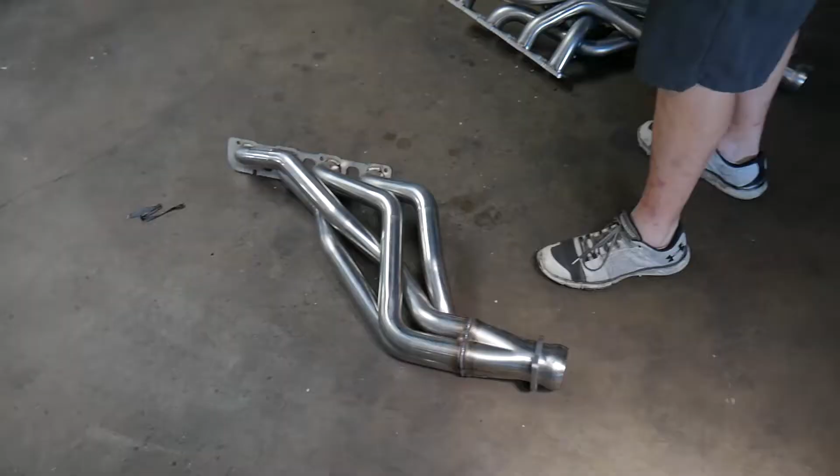And there they are, the Kooks goodies. John's been busting ass, and not out of his ass, like he's been working hard.

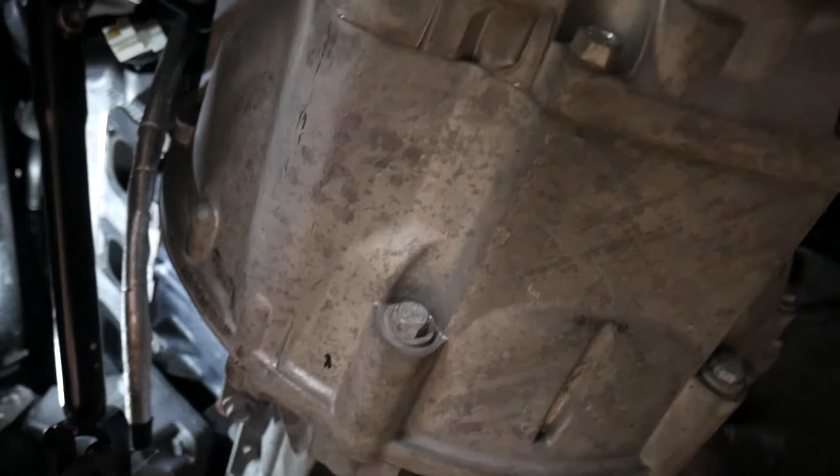He's got those stock manifolds out, so we're gonna get the sides of the heads cleaned up and start getting these Kooks long tubes installed right after lunch.

But both the headers are up now. We're just getting them finished tightening everything up, and then we'll get the mid pipes up, and it'll be time for a little pulley change action.

We'll probably go ahead and, before we wrap it up, pop the plugs out and tighten the gap up and check them. This car's been Procharged for a while, so we may throw a new set of plugs in it as well, but we shall see.

And just like that, we got some headers installed.

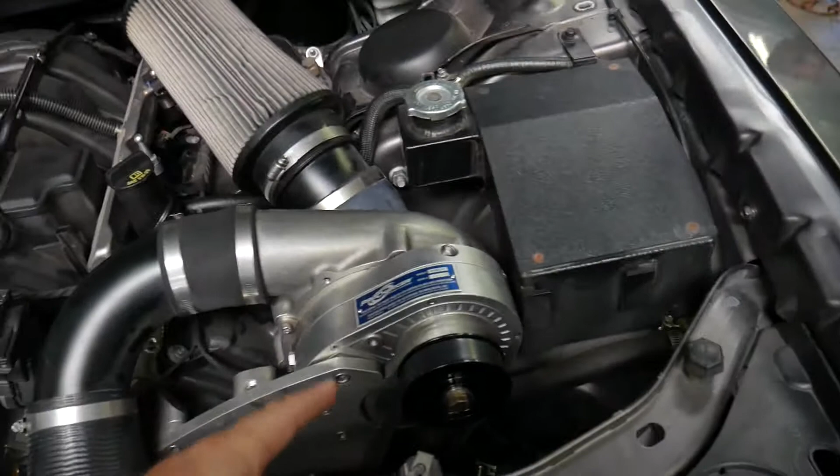Unfortunately, guys, I wasn't able to get any of the pulley change on camera for you. John knocked that out really quick while I was in the office with some customers, but no worries, it's done.

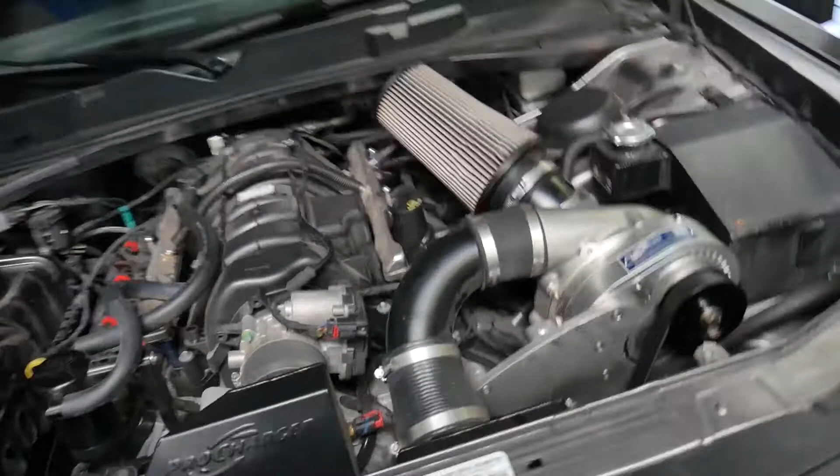The factory pulley that was on here was a 3.50. We went down to a 3.20. So hopefully that should net us 1.5 to 2 pounds of boost. We'll see when we get it on the dyno.

I'll see if I can find, because it was a long time ago when we did this car, the old dyno pulls from the last time it was on the dyno, so we can get a before and after of what it made. But it's all wrapped up, and we'll get the first start here in just a few moments.

To get you up to speed on the Raptor from this morning, we did some troubleshooting, some diagnostic on it. There's an exhaust leak, we're going to get that repaired, and we're going to put a fresh set of plugs in this thing. We're not going to do a full dyno tune on it, but we're going to do a little street tune. That's all that's happening to this one.

And then we had this Toyota Tundra dropped off. This is actually a family member of mine's. Pretty clean little truck. I got him some rock lights for it for Christmas, so he finally brought it in. We're going to get those installed on this tomorrow.

And then the 300, the Chrysler 300 y'all seen this morning, which is still out here, that was a diagnostic as well. Had a check engine light on for the exhaust gas pressure sensor. Really dumb. This car no longer has the exhaust provision for that due to the modifications to it, so that's why the light was on.

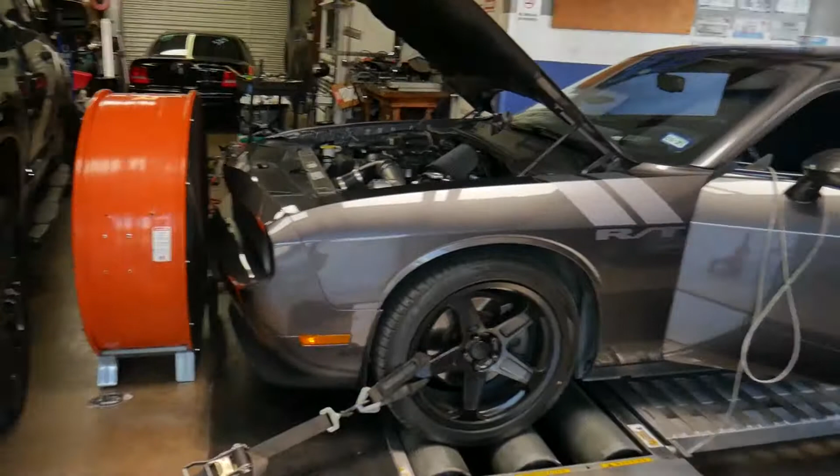Alright guys, so as you can see, we got Corey's on the dyno, and I missed filming the first pull, but I went in and made a few changes and pulled some timing out of it just so I could see where we ended up with boost and what our air fuels were looking like.

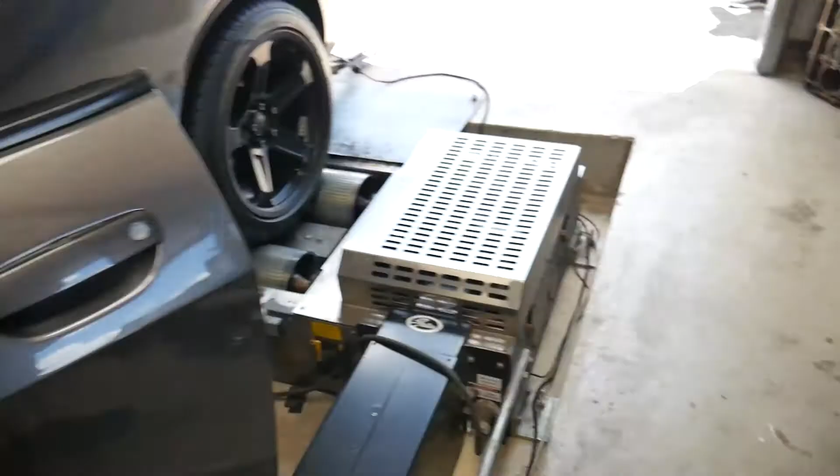But I just flashed it again. Here's the previous run, 486 and 508. Just a recap, this thing is a manual 5.7 with the Procharger on it. It's a P1 SC. Got it warmed back up, let's go ahead and make another tug.

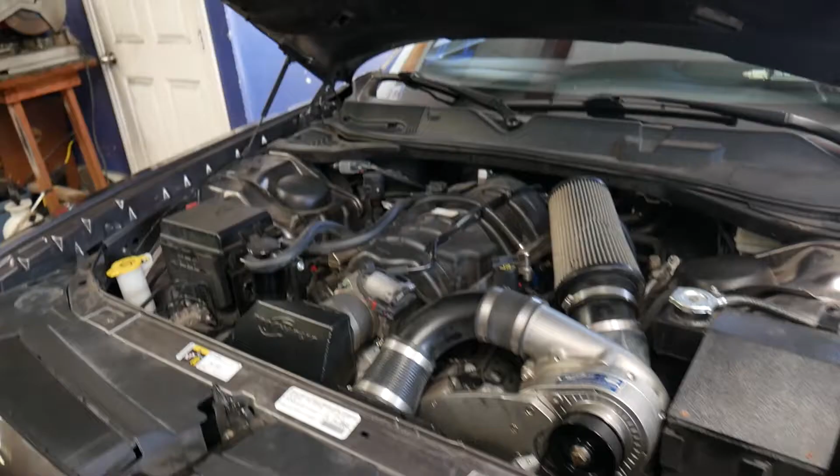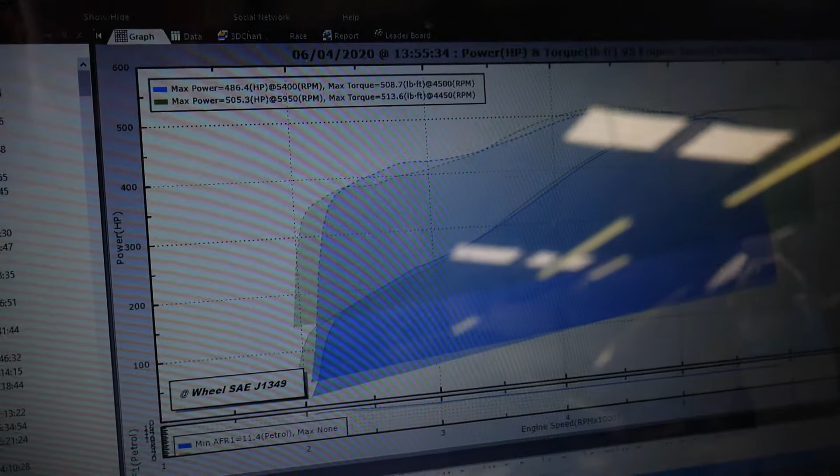Alright guys, that was a good tug. Nice gains on that one. So 505 and 513. Look at that.

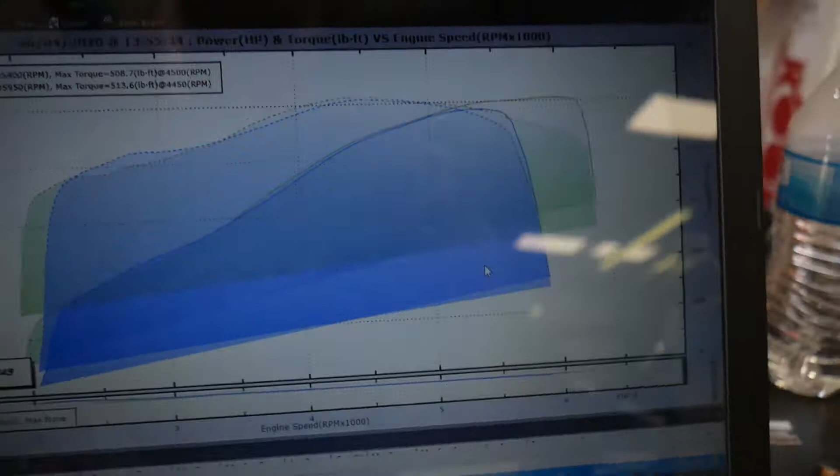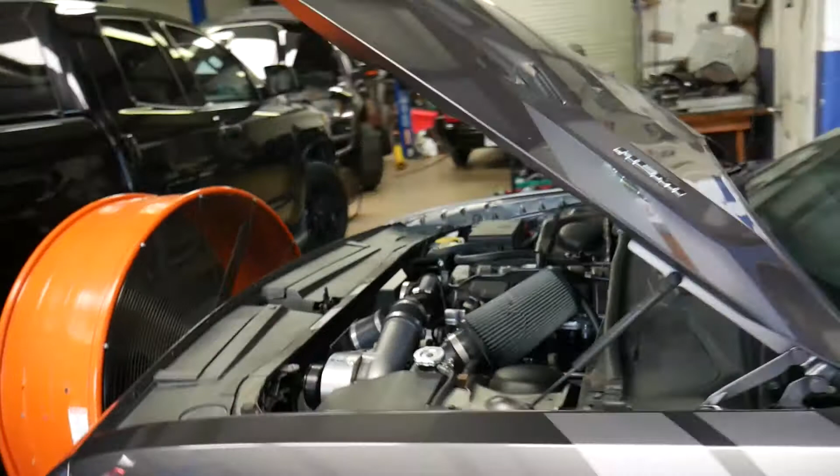So I'll go ahead and take a look over the logs here and see where we ended up with everything, and then see if we can squeeze a little more out of this 5.7. But I bet she feels pretty good.

Alright guys, so I looked over the logs. The standard P1 kit for these cars I think makes around 6.5 pounds of boost. We changed the pulley out from the 3.50 to the 3.20, and after reviewing the logs, it looks like we made 9 pounds. So we picked up about the 2.5 pounds that we were looking for with the pulley change. Also, to gain that boost level, we did raise the RPMs. I think factory is 5900 on these cars or something of that nature. We've got it at 6,300 RPM now as redline. So that also helped, raising the RPM got us a little bit more boost with that pulley.

We're still running the same belt that came with the kit, same size, same length, and it doesn't appear we're getting any slip as of yet. At some point we will make the recommendation to go with a Gates greenback, because we find those are about the best belts. The RPM series belts, in our experience, are junk, but the Gates greenbacks, the HD belts, are good. So for now, this belt's holding, it's not slipping, everything's good, but when it is time to change, we're gonna put a greenback on it. And we're gonna look over the log one more time, make some more changes, and see where we end up.

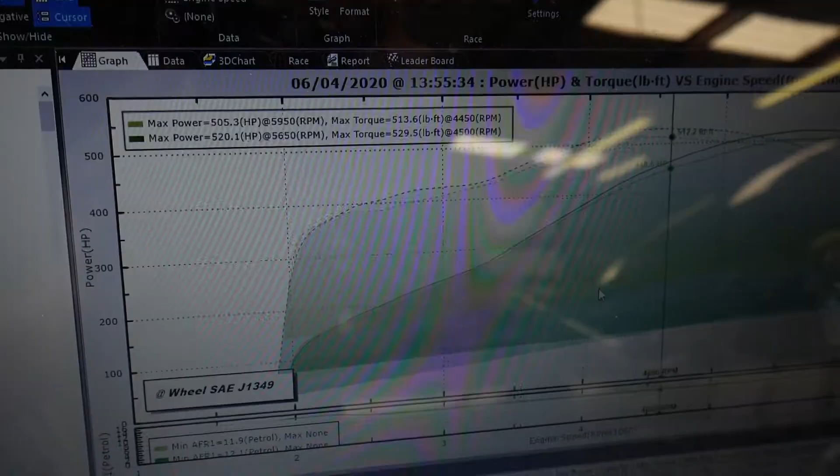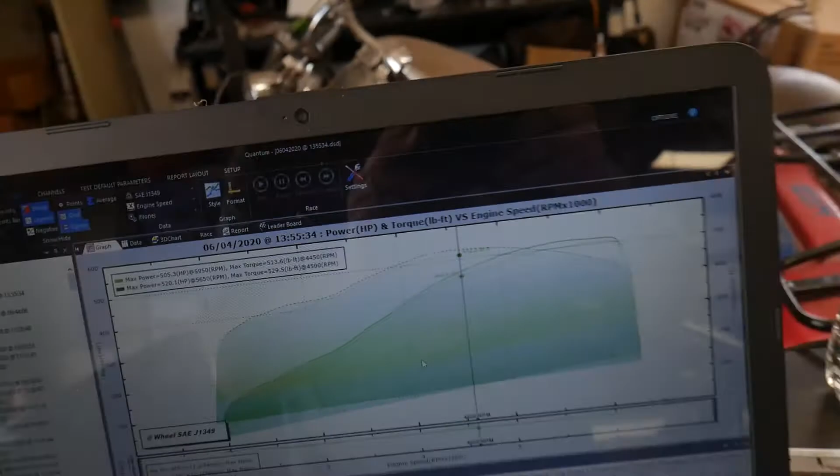Ooh, look at that! Sprinkle a little timing in the right places. She liked it, dude. So now we're at 520 and 529. Very nice, very nice. This 5.7's starting to scream.

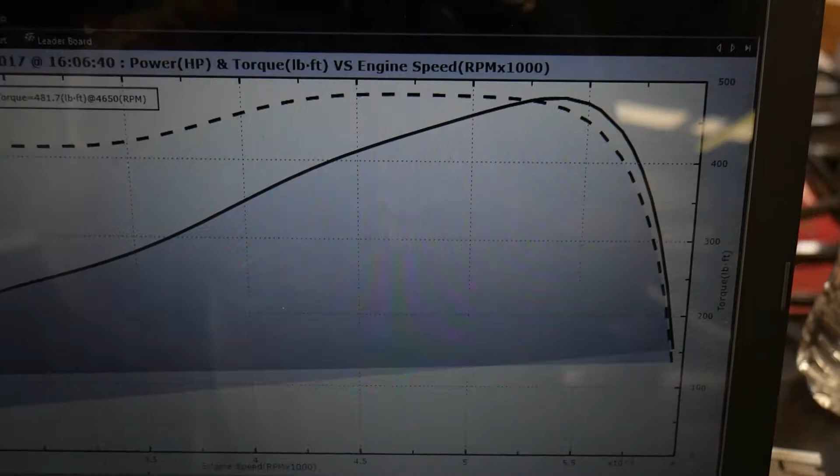Took a second to go back in the computer on the dyno and find out when we dynoed this thing, when we did the blower. Turns out we did this car 3/30 of 2017 is when we did the supercharger. So it's been on here for a while, doing good. Here was his previous dyno pulls. Last time the car was here when we did the blower, it made 479 and 481 foot-pounds of torque.

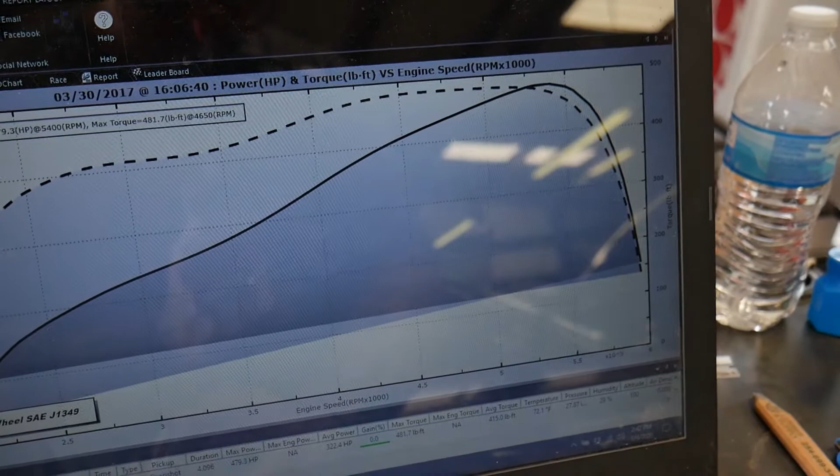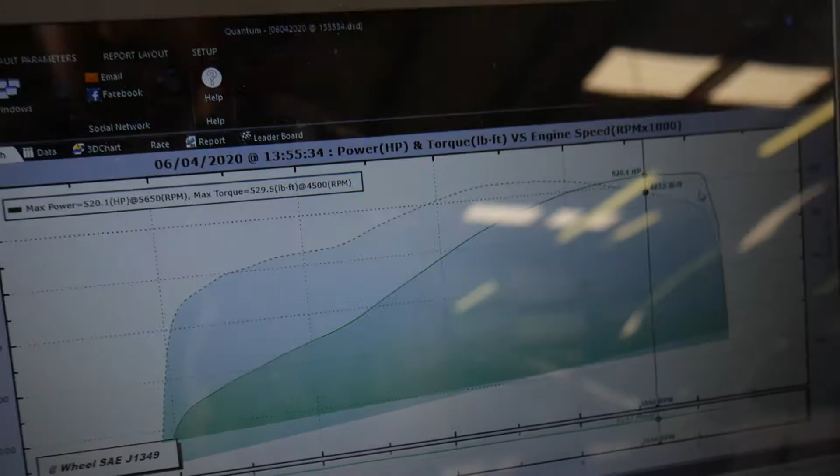And then this is today: 520 and 529 foot-pounds of torque. So nice gains. We changed the pulley and did long tube headers, catless, all the way back. Man, good power gains. Sounds nice and throaty.

I'm sure Corey will be nice and happy with the power increase. So I'm gonna look over everything, see if there's any more room for improvement, and we're gonna make one last pull and see what she makes. I'll let you guys hear this one from the back.

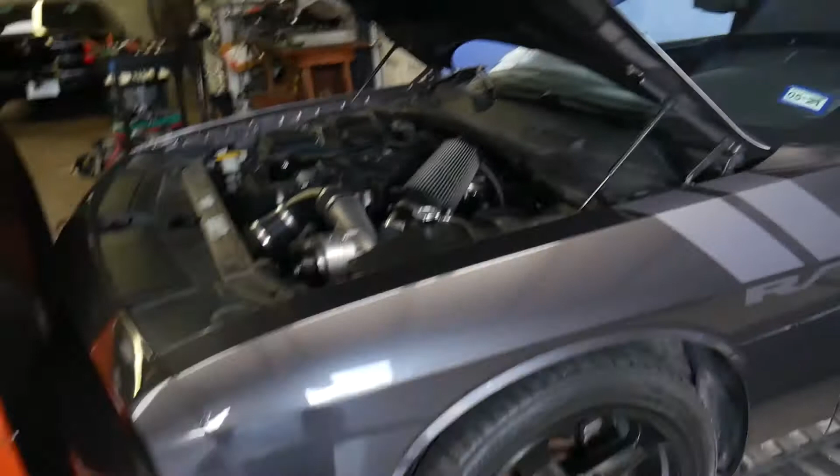Well guys, I think that's where we're gonna end up on this thing. It is a hot one today. I don't know if y'all can see the sweat pouring off my face, but it's every bit of 98 degrees today, and I'm not sure what it is in here. Let me see. Yeah, so the dyno computer is showing it's 89 degrees in here, and that's in the shade. But this thing, like I said, impressive.

Picked up probably about 40 horsepower over the last time it was here. Made 520 at the wheel. So yeah, I bet Corey's going to be very happy with his power increase, go out and terrorize the streets a little bit. But we're going to get this thing tore off the dyno, go drive it on the street a little bit, make sure everything's copacetic, and get it back to him.

Alright guys, we're gonna wrap this one up. We had a hard day today, but we got everything that we needed to get done, taken care of. Got Corey's all wrapped up and tuned. Just to recap, this is a 2014 Dodge Challenger 5.7 with a 6-speed manual. It's got its bone stock engine. It's got a P1SC Procharger setup on it, Kooks long tube headers, mid pipes, straight through exhaust. We did a pulley change on it, and this thing put down some power. It made 520 at the wheel. So that one's all wrapped up going home.

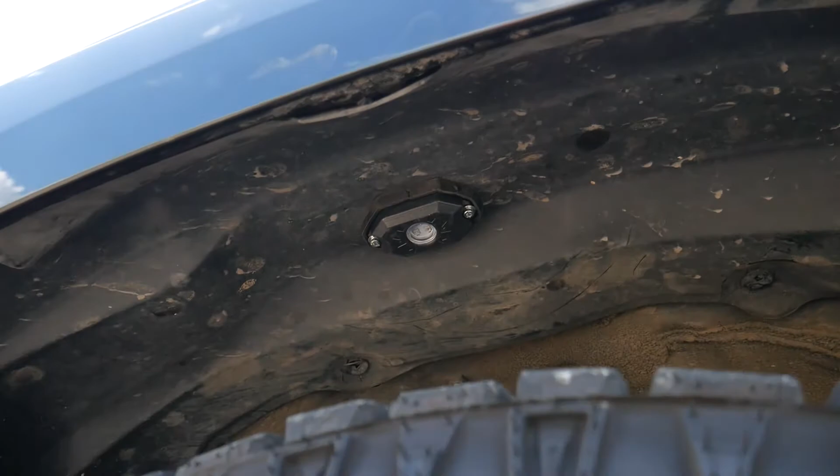We had a diagnostic / street tune on this 2012 Raptor 6.2. We got the spark plugs changed on it today, fixed an exhaust leak, and put a little street tune on it. It's all wrapped up going home. And then we got the Toyota Tacoma. Don't remember what year this one is, but we got it all wrapped up as well, except for one part. It's got to come back because we needed some extension harnesses. But got the rock lights in on this one. Yeah, got everything wrapped up.